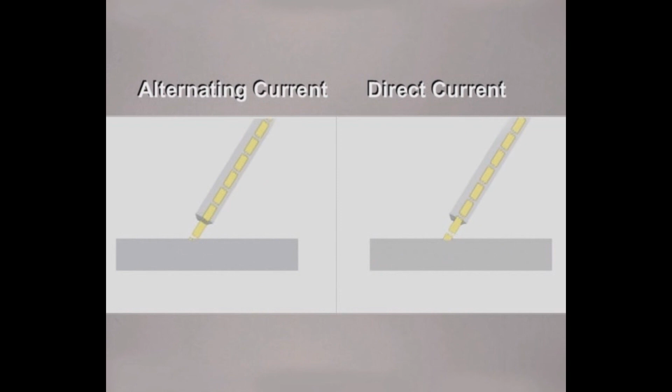Whether your welding machine is electric or portable, the power source will provide either alternating current or direct current to the electrode. Alternating current flows in both directions, creating an amperage lag. Certain welding rods have been designed with stabilizers in the flux to help maintain the arc through these lags. Direct current welding machines provide a steady flow of current in one direction. The direction of flow, called polarity, is determined by how the leads are connected to the welding machine. DC plus with electrode positive is the polarity typically used for shielded metal arc welding.

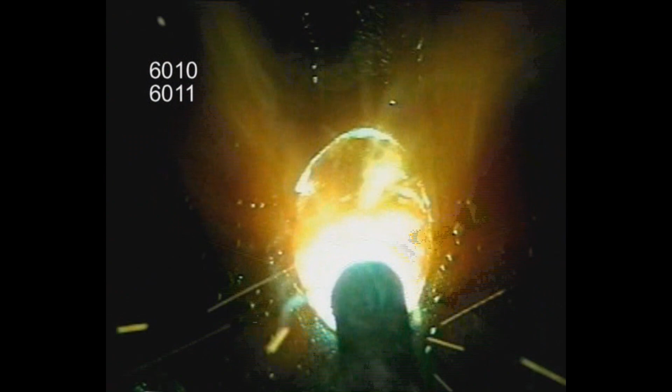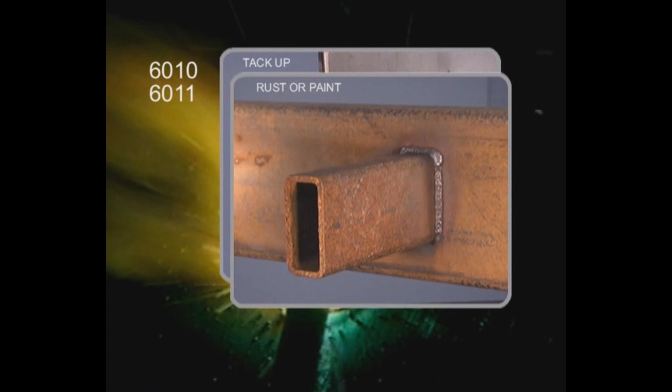All the common rods used for welding on carbon steel have characteristics that make them better suited for different situations. The fast freeze rods have a strong arc force that helps burn off surface impurities. A circular or side-to-side motion can be used to build up weld, or because of the light flux coating, these rods can be stepped to provide maximum penetration. In the vertical weld position, 6010 and 6011 can be run either uphill or downhill. These are good rods for tacking up weld joints, welding metal that is slightly rusted, filling gaps in poorly fit joints, and as a first pass for good penetration.

The filler rods don't penetrate as deep, they build up weld. Stabilizers in the flux make 6013 one of the simplest rods to use. With a slightly heavier slag covering, try to keep the arc in the puddle. 6013 can also be run either up or down on vertical welds. For general purpose welding, 6013 produces a smoother finished weld bead.

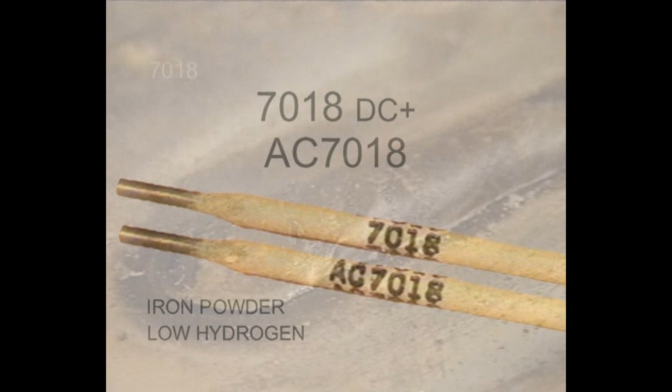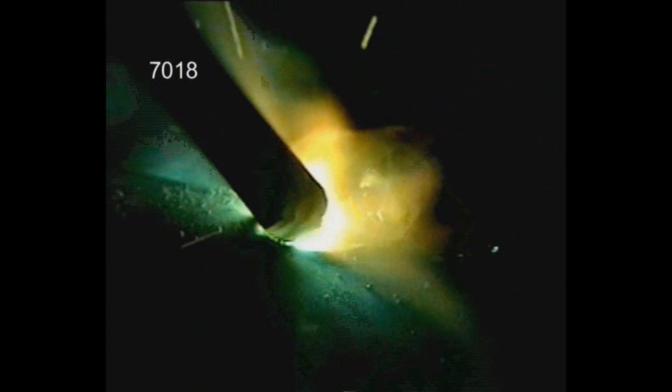7018 contains iron powder in the flux and low hydrogen characteristics. Except for directly under the arc, a heavy slag covers the entire weld puddle. Either running straight or with a side-to-side motion, the arc needs to be maintained on the leading edge of the puddle. In the vertical position, 7018 is run uphill. 7018 requires better rod control, but does provide the strongest welds for heavy stress situations and also the smoothest welds for ornamental type projects.

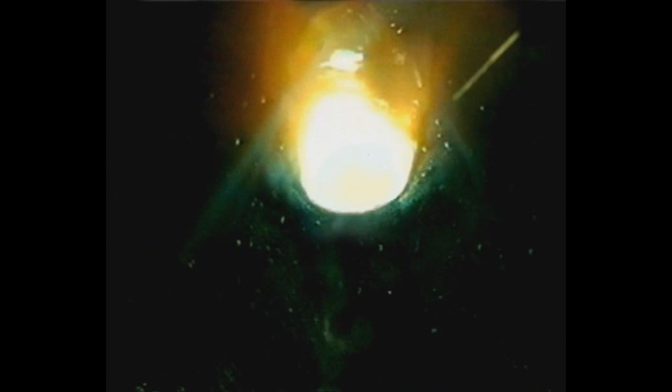You should always examine the finished weld bead for any defects, but really, you need to see the weld as it's going in. This is a totally manual process. You have to control the heat and filler metal during the weld by watching and understanding the molten puddle. Look past the rod and the light, focusing directly on the molten pool. Watch the edges and the weld buildup, constantly analyzing how it's flowing out and how fluid it is, making slight adjustments when necessary.

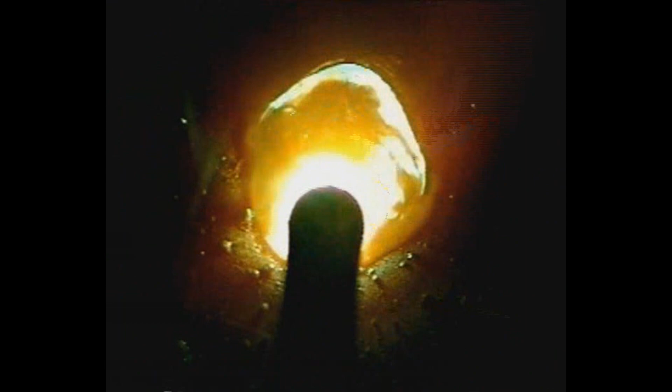The amperage setting, which regulates the amount of current flowing through the rod, is the main control of the heat available to the weld. When the amperage is set too low, the puddle only forms under the rod. Increasing the amperage generates enough heat to form a molten pool. Along with starting to get penetration, this is where you begin to have control of the edges of the puddle and the weld buildup. There isn't an exact amperage setting here; in fact, this is one of those things that welders see differently.

Also, as the metal thickness or weld position changes, the amount of heat required will be different. Watch the puddle. You're looking for it to flow out to the sides of the rod. When the amperage is increased more, the molten pool penetrates deeper and spreads. Eventually, the filler metal becomes so fluid and agitated you can no longer control it. Experiment with the amperage setting. For good penetration and smoother welds, you want the amperage set as high as you can while keeping the molten metal from becoming too fluid to handle.

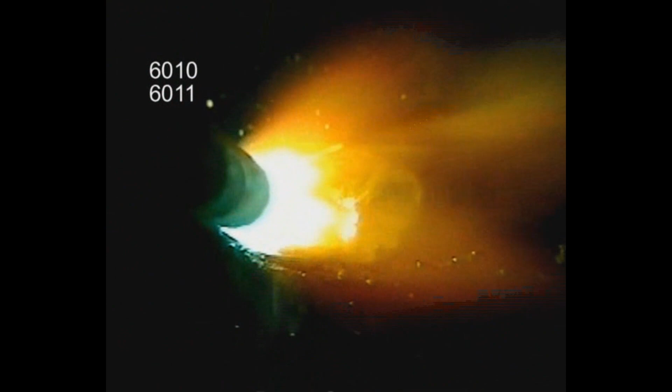Because of the characteristics of the flux coating, the puddle will look different depending on the type of rod you're using. The entire puddle is visible with 6010 or 6011. Slag covers the top rim of 6013, but the molten metal is still visible on the sides, and the puddle should move easily with the rod.

With 7018, slag covers the entire puddle, but you still want to see it flowing out to the sides, with the slag solidifying back from the rod. During the weld, the filler metal is actually solidifying underneath while the slag stays molten.

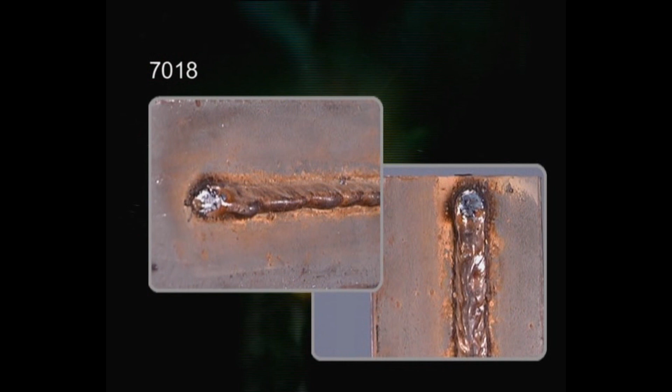In the horizontal or vertical position, the slag can run or drip. Don't let this fool you into thinking the weld is too hot. You'll probably need to experiment more to set the amperage for 7018, but you will get better results running a little to the hot side.

Regardless of which rod you use, the amperage only provides the heat. The rod angle determines how fast the metal will heat up. When the rod is held more perpendicular, the molten pool forms and spreads quickly, allowing a faster travel speed to limit penetration on thinner metals, deposit less metal for a smaller weld, or flatten the bead in a bevel.

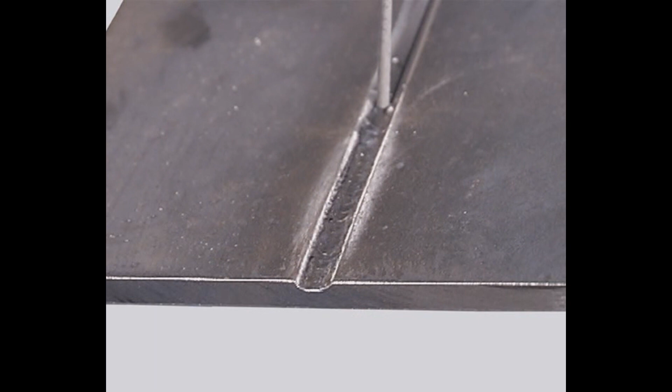As the rod is angled, some of the heat is taken off the metal. A slower travel speed can be used to build up a crowned weld bead. If the rod is angled too much, the metal won't get hot enough. The molten pool will narrow, the bead will stack up, and you'll lose control of the edges of the puddle.

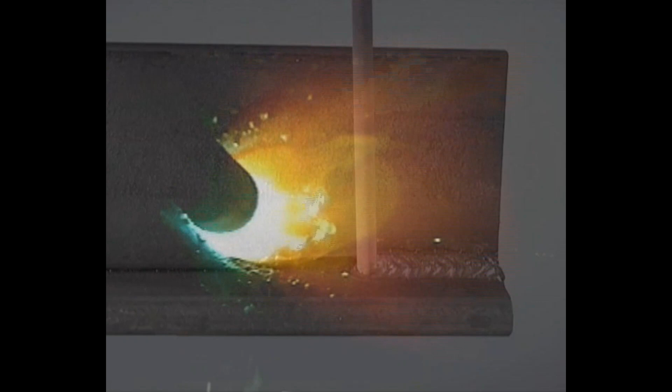On most weld joints with a good fit up, you want to maintain a consistent rod angle to produce a uniform weld bead. In some situations, though, you may need to vary the rod angle during the weld. To fill a gap in a weld joint, the rod can be angled more, slowing down to deposit more metal, keeping the build-up uniform, then angled back up to finish the weld.

Controlling the rod angle takes a little practice, but you need to stay loose and relax. Whether you're holding the rod up to flatten the bead or angling it to build up weld, you want to travel at a speed that keeps the molten puddle the same size.

Watch the puddle. If the travel speed is too fast, the metal doesn't have time to melt, so the puddle narrows. If the travel is too slow, the metal gets hotter and the puddle spreads. Depending on the rod, the filler metal may flatten out or stack up and roll. Always maintain the size of the puddle with the travel speed.

Last is the arc gap, which is the distance from the tip of the rod to the metal. Shielded metal arc welding machines use a constant current power source. The amperage is set with the voltage varying to maintain the arc. You want to avoid jamming the rod right down against the metal or long arcing too far, but you can use slight variations in the arc gap to help control the heat and shape the weld.

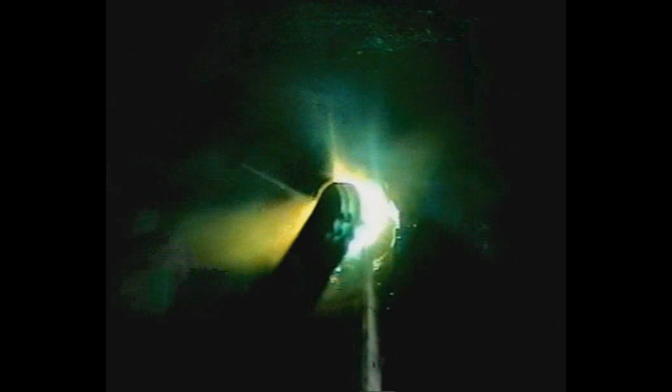This is difficult to measure, but a medium arc length is used to build up weld. Shortening the arc reduces the heat, cooling down the weld puddle. Try using a shorter arc gap on vertical up with 7018 when you want to build up more weld. Slightly lengthening the arc causes the heat to increase, spreading the puddle out, and is used with a more perpendicular rod angle for making smaller beads or flattening the weld on heavier metal.

It is important to be consistent though. Varying the arc gap during the weld changes the heat, making it difficult to maintain a uniform weld puddle.

When you start looking at all the aspects of running a weld bead, there are many possibilities. That's why everybody welds a little different. Practice and experiment, trying to make that puddle do what you want it to do. Watch other welders if you get the chance, but in the end, you need to see the weld puddle at the end of your rod and develop a style that works for you.

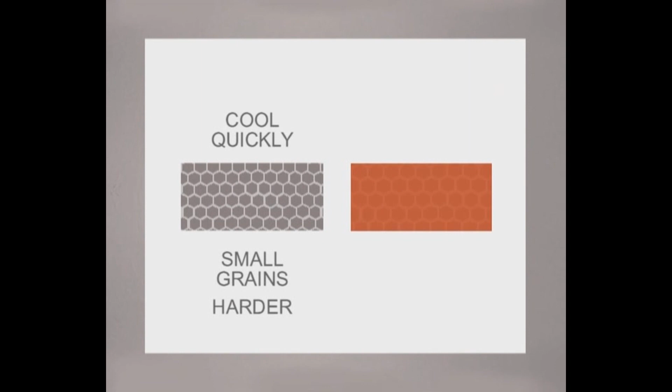We've been looking at heating the metal to allow the molten pool to penetrate and fuse. All that heat also has an effect on the base metal itself. Metal is made up of groups of atoms bonding together to form grains. When metal is heated past a certain temperature and cooled quickly, smaller grains are formed, making the metal harder. Cooling the metal slowly allows more atoms to bond, forming larger grains, which makes the metal softer.

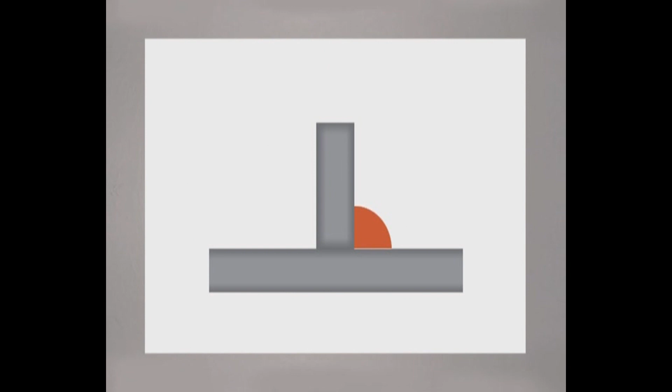In welding, the metal adjacent to the weld bead becomes hot enough to change the structure of the grains. Because only a relatively small area is heated, the metal cools quickly, forming smaller grains and becoming harder right alongside the weld. Welding also causes the pieces of metal in the joint to draw. Heated metal expands, so during the weld, the molten filler metal is deposited in its maximum expanded state. As it cools, it contracts. When the metal is free to move, it will draw in the direction of the weld.

If the pieces being welded are trapped, the molten weld metal still contracts, leaving some residual stress in the metal. There isn't any way to stop this—the metal is going to move. Whenever possible, weld on both sides to reduce the draw, and on pipe or square tubing, use a sequence of welds to help control the draw.

Extreme differences in temperature do have a greater effect on the metal. If it's freezing cold, use a torch to heat the metal up a little. Condensation will appear, so just warm it up until the moisture dries. Also, if you're welding on harder, higher carbon steel, which does not handle expansion and contraction very well, a preheat may be necessary to prevent the weld from cracking as it cools.

As always, there are a lot of variables: the type of steel and the stress that will be put on the finished product. In most cases, projects are designed so that the stress put on the weld joint does not come anywhere close to the maximum strength of either the metal or the weld. Try to complete the weld once you start it and avoid building up more weld than necessary. When you're finished, let the metal cool slowly. If the metal does break next to the weld, you may need to take a closer look at the thickness of the metal being used and the overall design.

Okay, let's take a look at putting two pieces of metal together.

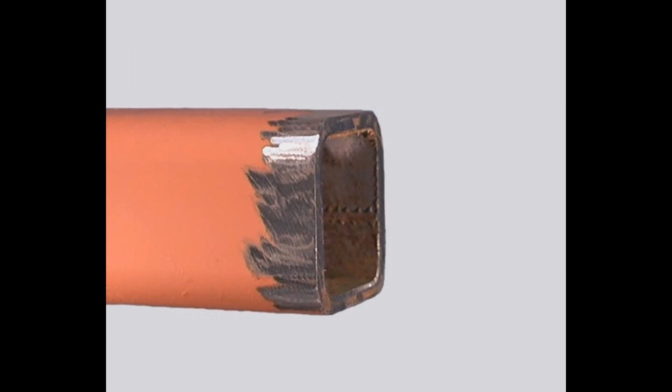The first steps with any type of weld joint are metal preparation and joint fit-up. If you're working with new metal, most rods can handle the mill scale, which is a dark layer on the surface. Use a grinder to clean any metal that's rusted or painted. Impurities on the surface can cause porosity, lack of fusion, or even interfere with the arc.

When you're cutting metal, keep the edges straight and square. If you use a torch, chip or grind off any slag left from the cutting process. During fit-up, use good tacks to hold the pieces together, and if you're leaving a gap, keep it uniform. Irregular gaps in the joint not only take longer to weld, they make it way more difficult than it should be. You can avoid a lot of problems by cleaning the metal and taking your time on fit-up.

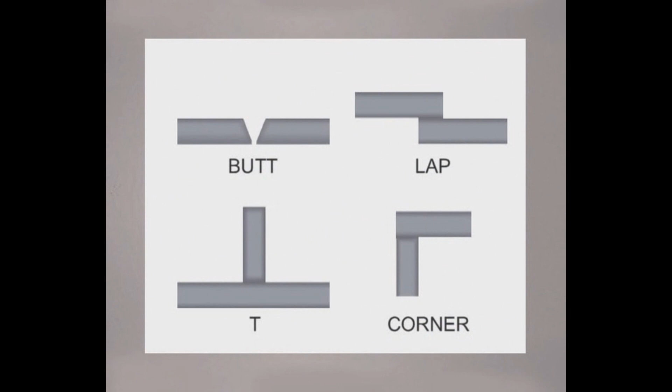While there are many variations of weld joints, there are generally considered to be 4 types: butt joints, lap joints, T-joints, and corner joints. On a butt joint, the weld should penetrate deep, with the amount of weld deposit at least equal to the thickness of the metal. For maximum strength, 100% penetration welds are used to completely fuse the edges.

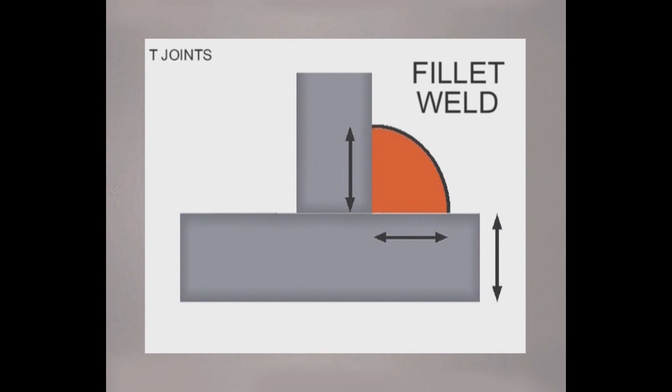On a lap joint, the weld is called a fillet, with the legs coming up and out a distance equal to the thickness of the metal and the weld slightly crowned. A fillet is also used on T-joints, where the edge of one piece is joined to the surface of another. Welding on both sides reduces the amount of weld necessary and overall produces a stronger joint. Corners are joining the edges at an angle, with metal preparation or fit-up allowing for sufficient penetration and weld deposit.

Let's start with butt joints, and this can be on plate, flat bar, angle iron, pipe, or square tubing. When the metal is around 1/8 of an inch thick, keep the edges straight and square for a perfect fit. You'll generally get good enough penetration just butting the pieces together, especially if you can weld on both sides or all the way around. On plate or flat bar, tack right on the outside edges to help carry the heat.

For square tubing, tack the corners, then weld opposite sides from tack to tack. If you intend to grind the weld off for a smooth finish, you can leave a very slight gap, but keep it uniform. Whenever possible, start at the outside edge and weld towards more metal.

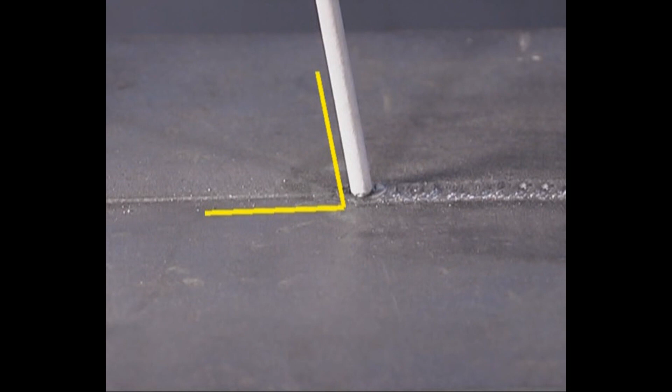In the flat position, hold the rod fairly perpendicular to the metal. You can weld with 6010 or 6011 using a circular motion. Turn the amperage down a little, but you're going to have to travel faster to control penetration and avoid burning through. For a smoother finished bead, try 6013 or a 3/32 7018 with a side-to-side movement.

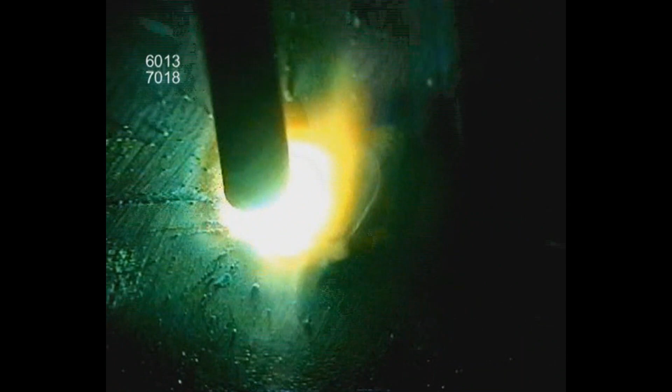On a horizontal, hold the rod nearly perpendicular to the weld. Watch the puddle—with 6010 or 6011, adjust the travel speed to let the puddle spread out without overheating the metal. Watch the top side to avoid undercutting. With 6013 or 7018, try running straight without any rod movement, maintaining a uniform arc gap and travel speed.

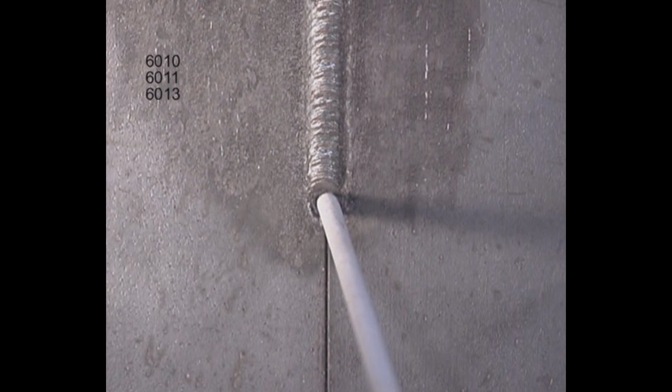If you can position the joint, butt welds on 1/8 metal are easier welded vertical down. 1/8 metal is fairly thin for stick rod, so use some practice metal to figure out the amperage and adjust your travel speed.

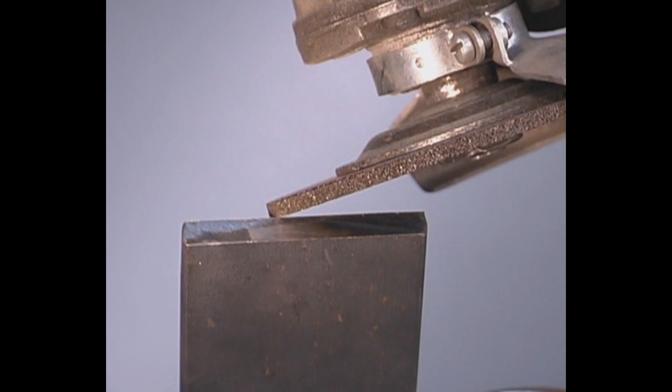Starting at 3/16 of an inch, you want to bevel the edges to allow for good penetration. Bevels are generally around a 30-degree angle, with the top edge straight and a flat spot called the land on the bottom. Hold the grinder at a slight angle, using the bottom corner of the disc to take off metal. When you have it close, hold the grinder flat to smooth the bevel and straighten the top.

On heavier metals, it may be easier to cut the bevel with a torch, then finish it with a grinder. The reason for beveling the edges is to control the puddle deep in the joint. If the bevel isn't wide enough to get the rod into the bottom, you can always take the grinder up on edge, slightly cock it, and use the curve of the disc to open the bevel up a little more.

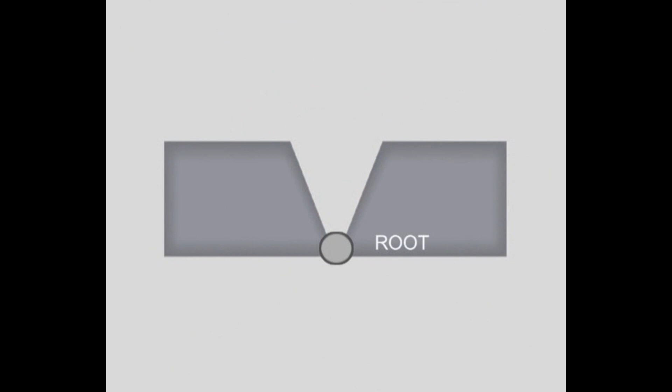A beveled butt weld can be divided into 3 parts: the root, which is the first pass fusing the bottom of the joint, the filler, and the cap. There are several options in fitting up butt joints, and the main difference is how the root pass is welded. The bevel pieces can be fit up with a small gap, allowing the first pass to penetrate as deep as possible. For 100% penetration, either a backup bar is used, with the first pass fusing all 3 pieces, or the metal is fit up with a gap, and the root fuses the bottom edge and actually builds weld on the back side.

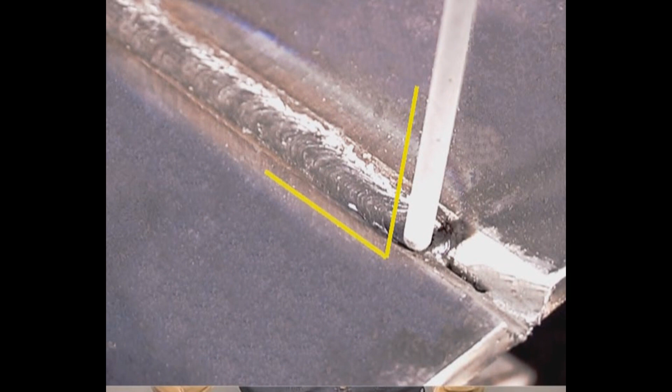After the first pass, filling and capping is basically the same, so let's take a closer look at getting the joint started. Anytime you weld in a bevel, you want to hold the rod fairly perpendicular to the metal to flatten the top of the bead. If you angle the rod, the weld bead will crown, leaving slag that may get covered on the next pass.

You also want the weld buildup even. Use a grinder to knock down any high spots from stopping and starting. It's a lot easier to keep it uniform with a grinder than to try to fix it with the next weld bead. Also, if the bead does crown in the bevel, use your grinder to knock off the top to avoid trapping slag.

Not all welding situations require 100% penetration. That depends on the type of stress placed on the joint. But you always want to bevel the metal, leaving at least a small gap. 6010 or 6011 will provide good penetration, and for the first pass are a little easier to deal with in any of the weld positions.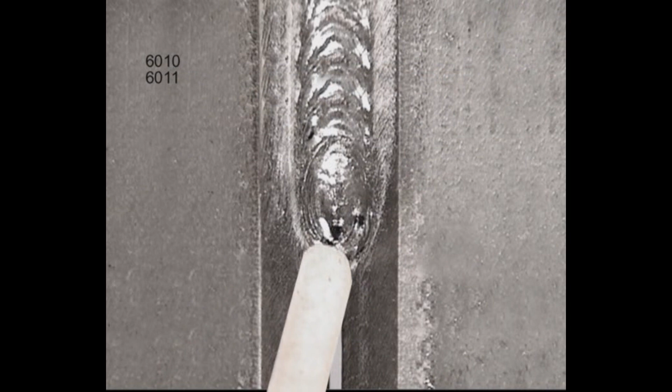You can use a whip or step motion, gouging into the metal for penetration, then pushing the puddle in to fill. Watch both sides to avoid undercutting along the edges. For more weld buildup, try using a modified circular motion, always coming back to the leading edge of the puddle in the bottom of the joint.

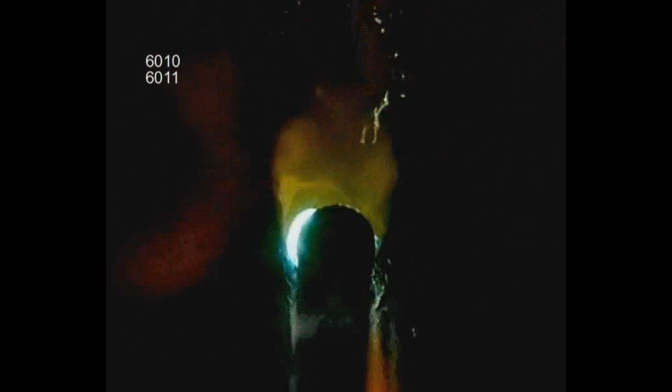If you can handle the puddle, you can also use a filler rod. With 6013 or 7018, hold the rod fairly perpendicular. Use a slight side-to-side movement and avoid jamming the rod into the sides. Depending on the bevel and gap, you may need to follow the metal to maintain a uniform arc gap. The base metal is getting thicker as you come up the bevel, taking more heat.

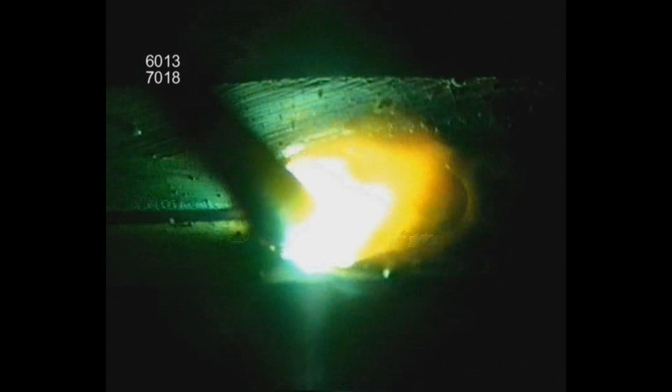During the weld, you want to see the edges of the puddle flowing out and tying in on the sides of the bevel. After the first pass, chip the slag, clean it with a brush, and you're ready to fill and cap. If you can get to both sides of the metal, you can weld the backside for a stronger joint. Grind down to clean metal, keeping the depth and width uniform. With the rod angled a little more, slow the travel speed and build up welds slightly wider than the groove and above flush with the surface.

Some welding situations require complete penetration for strength. If the pieces being joined do not fit up perfectly, or with some grades of hardened steel that tend to crack on the first pass, a backup bar is used. A V-bevel with a backup bar is also the procedure for structural welding tests. The goal is to melt and fuse the bottom edges of the pieces being joined to the backup bar.

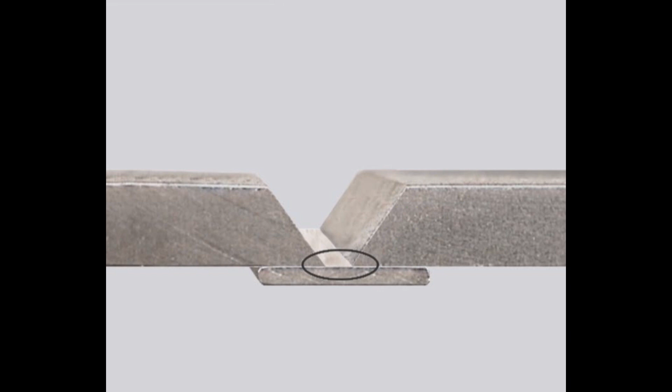Prepare the bevels with slightly less of an angle and a feathered edge. Grind off the mill scale on the backup bar. Only a narrow strip is going to get tied in, and you don't want surface impurities taking the heat. Fit the backup bar tight with around a 1/4 inch gap. This type of joint is generally welded all the way with at least a 1/8 7018, and you have to be able to get the rod all the way to the bottom.

Either tack up on the backside, staggering the tacks, or in the bevel. When you tack in the bevel, grind the starts and stops thin. Always keep in mind, along with fusing the pieces at the bottom, you also want the top of the weld relatively flat to avoid trapping slag.

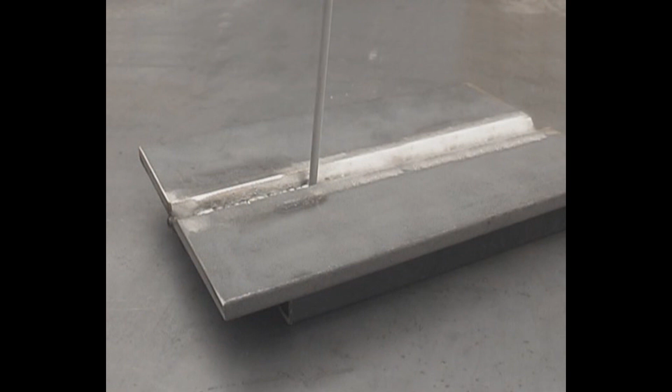In the flat position, hold the rod nearly straight up and down, angled slightly back towards the weld. Keep the arc on the leading edge of the puddle. With a slight side-to-side movement, pay attention to the arc gap. You want to see the edges of the molten pool tying into the sides of the bevel to avoid crowning the bead.

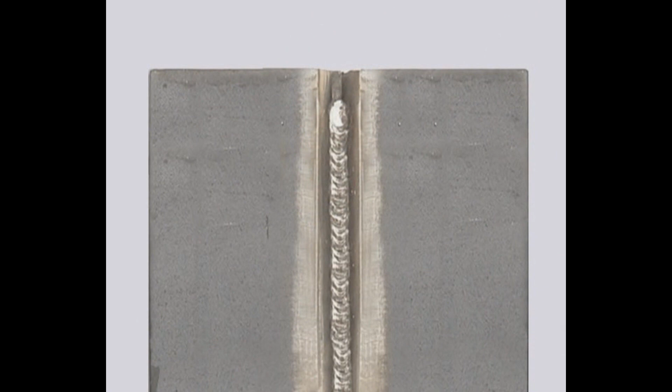When you're using 7018 in a bevel, stay ahead of the weld buildup and slag. If molten slag is pushed in front of the rod, it can interfere with the arc or limit filler metal fusion along the sides. On vertical up welds, you won't have any problems fusing the base metal to the backup bar. You do want to keep the weld bead flat without undercutting along the edges.

Keep the rod fairly perpendicular to the metal, angled up slightly. The puddle needs to flow out on the sides for a flat weld bead and to avoid undercutting. Travel up fast enough to keep the metal from overheating, which causes the molten puddle to spill down. You may need to lower the amperage a little, maybe 5 amps or so, but don't lower it too much, as many problems are caused by running too cold on verticals as by running too hot.

Remember, the amperage only provides the heat. It's the travel speed, rod angle, and arc gap that determine just how hot the metal is going to get.

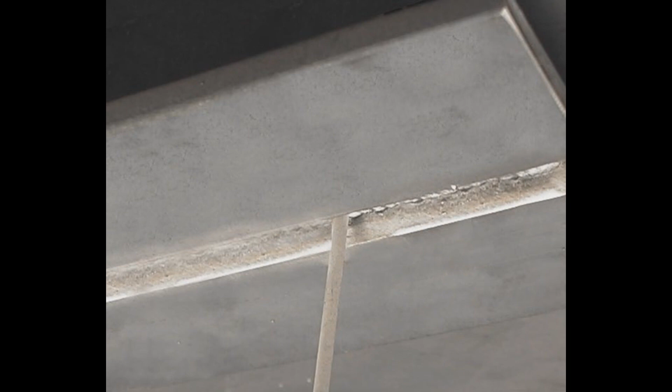On overhead butt joints with a backup bar, you don't get to build up quite as much weld bead. With the rod nearly straight up and down, adjust the travel speed to let the puddle spread out without overheating the metal. Most of the problems with overhead come from not controlling the rod.

When the tip dances around, varying the arc gap, the amount of heat at the weld is not uniform and focused. Find some way to steady yourself so you can control that rod. Also, if the rod is angled too far back towards the weld, the molten filler metal takes the heat instead of the metal, causing the puddle to drip.

Horizontal is generally not used for welding tests, but you often get them in practical situations. Angle the rod up and slightly into the weld. The bottom bevel acts as kind of a landing, helping to hold the weld, so you may be able to use a slight rod movement.

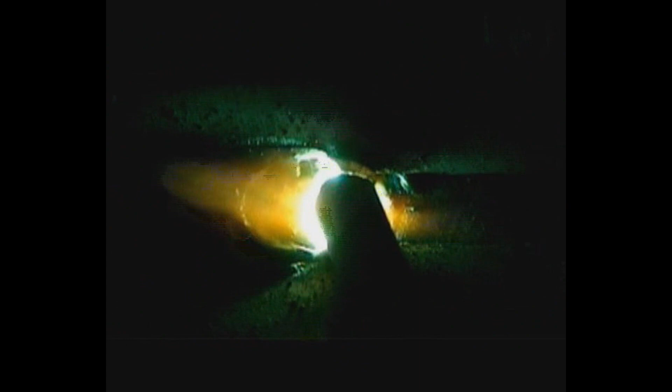Watch the top side and push the puddle up. Set the amperage to allow a fast enough travel speed so the base metals don't overheat, which causes the puddle to become too fluid. Don't try to carry a lot of metal on a horizontal. Just get all the pieces tied together and keep the filler metal from sagging.

The last type of root is in a V-beveled open butt joint. We're going to shove a 6010 rod deep into the gap and run a weld bead on the back side of the metal. Preparation and fit-up are more critical, so take your time getting the metal ready.

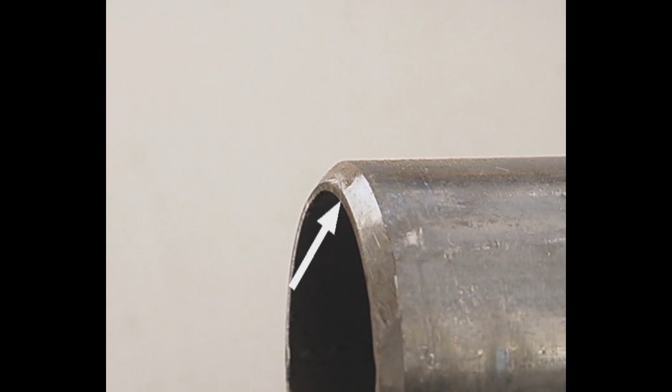The edge of the bevel needs to be straight and square. Grind off all the mill scale on the bottom side. A half-round file works good to clean up the inside of square tubing or pipe. The landing should be uniform. Use a file to knock down any high spots.

With a 1/8 6010, I use a 1/16 oxyacetylene welding rod as a spacer with around a 16th landing. The size of the gap and landing can vary a little, but when you figure out what you like, try to keep it consistent for every weld you make.

Line up the bottom edges of the metal. With a spacer to adjust the gap, run one tack, pushing the rod right down into the gap. Before you finish tacking up, remove the spacer. As tacks cool, they contract and the spacer gets jammed up. So pull the spacer, make sure the gap is uniform, and finish tacking the joint.

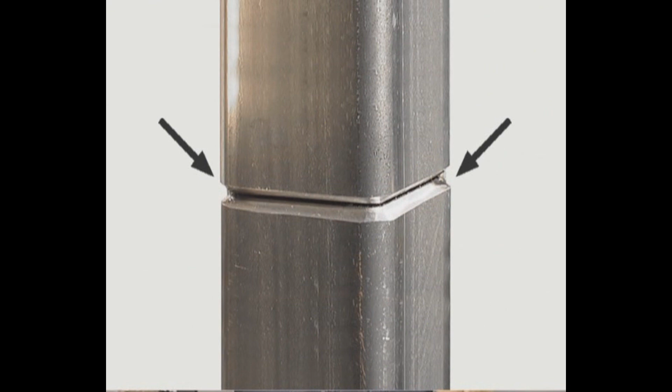On heavier pieces, after the first tack, use a small wedge or a screwdriver to keep the gap uniform. Because of the taper, you can remove these after the joint is completely tacked. On square tubing, tack opposite corners. For pipe, opposite sides. Make sure the gap is uniform, straightening when necessary, then put in two more tacks.

Flat, horizontal, overhead, and vertical down root passes are all done the same way. Grind the edges of the starts and stops thin. Hold the rod perpendicular to the metal. Scratch start right on the tack. Push the rod down into the puddle and start moving.

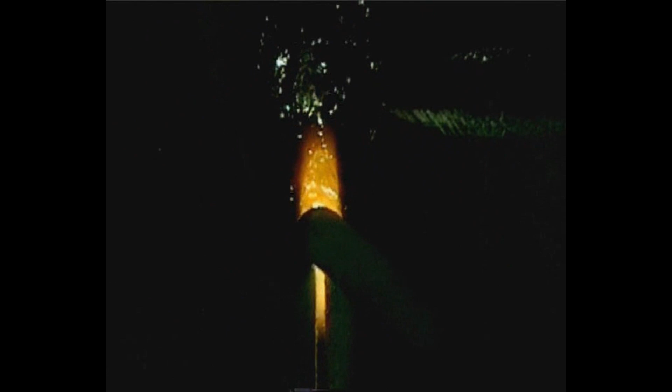The filler metal won't squirt out the back until you hit the thinned out edge of the tack, and it can poke through. Then move as fast as you can keep the gap filling in. If you're not getting all the way through, you will see filler metal squirting out behind the rod, back up in the bevel.

Most of the light and sparks will be on the back side, and you're building weld on the back of the metal. You want the amperage relatively high, so try starting about the same as you'd run flat. If you do open a hole, stop right away, pulling the rod back over the bead. Restart right at the edge and keep going. When you finish the weld, grind the edges thin on both sides of the hole and fill it in.

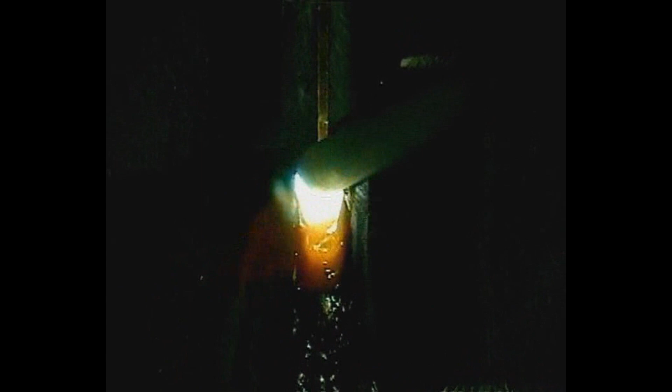Some welding procedures require a vertical up root pass, and generally you'll need to run about 5 amps lower for uphill. The easiest way is to prepare the metal exactly the same, with a uniform narrow gap, shoving the rod in perpendicular and moving up as fast as the gap fills in. Some welders like to thin out the landing a little more, and with a step motion, rip a small keyhole, then fill it in, rip a hole, and fill it in, always keeping the rod deep in the gap.

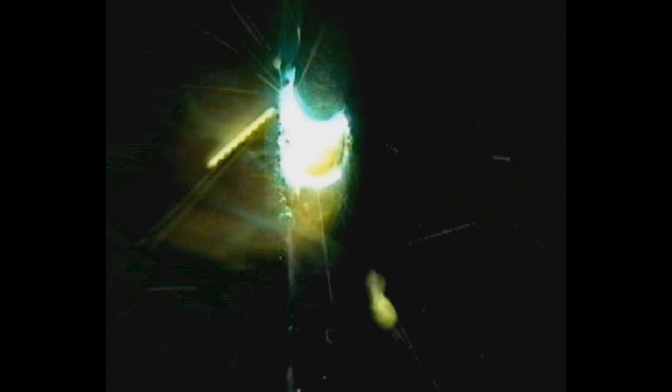Other welders like to leave a little thicker landing and wider gap, here again using a step motion, laying metal in and making sure it's fusing on the bottom corners. The disadvantage to stepping the root is the possibility of undercutting along the edges on the back side. The advantage is that you actually see the root going in for 100% penetration. Stepping the root uphill also works well when the gap is uneven, with wide or narrow spots.

The backside bead should be above flush, with the entire bottom edges of the bevels melted and fused. Any missed spots are called insufficient penetration. If the travel speed was too slow, the bead stacks up on the backside, causing excessive penetration. On the front side, because the rod was jammed right down against the metal, the bead will crown and undercut along both sides. Grind this out to avoid trapping slag.

The metal will be thin from grinding, so you need to run another bead called a hot pass to add a little more metal and burn out any slag left behind. With 60-10, try stepping in the hot pass, not gouging quite as deep on the backstroke. Use a faster travel speed so you don't burn through, and watch the sides to avoid undercutting.

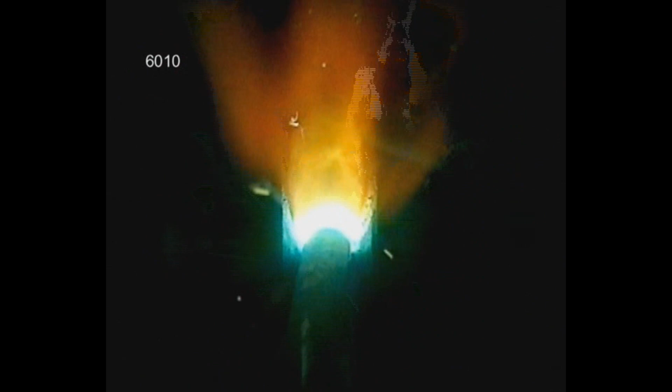You can also hot pass with a 3/32 70/18. Hold the rod fairly perpendicular. Carry the heat on the sides, moving across the center relatively quick. Don't try to build up a lot of weld, and make sure the sides of the puddle flow out so the top of the weld stays flat.

Once the bottom of the joint is fused with any of these procedures, you're ready to fill and cap, and you will get better results using 60-13 or 70-18. If the metal isn't too thick, you may be able to finish with one more pass. On heavier metal, when more filler is required, remove all the slag between passes with a chipping hammer and wire brush. This comes with experience, but plan the weld.

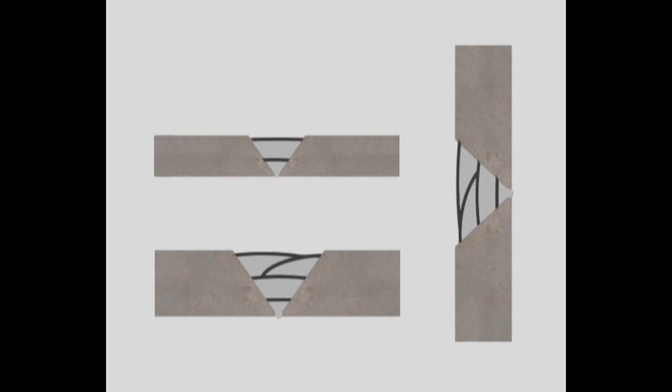When several filler passes are required, overlap the edges of the previous beads if possible. The last filler pass should be slightly below flush. Try to leave the top corners of the bevel. With a slight side-to-side movement, pay attention to the arc gap. Don't jam the rod into the sides of the bevel.

Keep the rod fairly perpendicular and the puddle flowing out to avoid crowning the bead. You may need to speed up or slow down to control the amount of filler metal deposit, but try to leave the top corners of the bevel. To cap the weld, angle the rod and slow down to build up a crown weld bead. Use the edge of the bevel as a guide to keep the sides of the weld straight.

The finished weld should be as thick as the metal, so if you've penetrated deep, the cap only needs to be slightly wider than the bevel and above flush with the surface of the metal. Piling up more weld than you need doesn't add any strength, just takes longer and puts more heat on the metal. If the top of the bevel is too wide to cap with one bead, run two or more passes side by side to cap the weld.

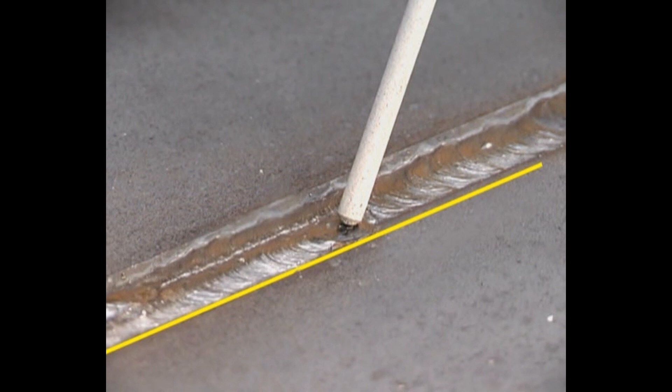With a slight side-to-side movement, using the bevel as a guide, keep the outside edge of the first bead straight. Use the inside edge of the bead as a guide for the second pass. Adjust the travel speed and rod movement so the puddle flows out almost to the center of the first bead. The final pass will generally be smaller.

Try holding the rod more perpendicular to the metal, running straight. Use a faster travel speed for less weld deposit. On a horizontal, angle the rod up slightly with a medium arc length.

Try running straight without any rod movement. The first bead will help hold up the second pass, so hold the rod more perpendicular and travel fast enough to keep the bead from sagging.

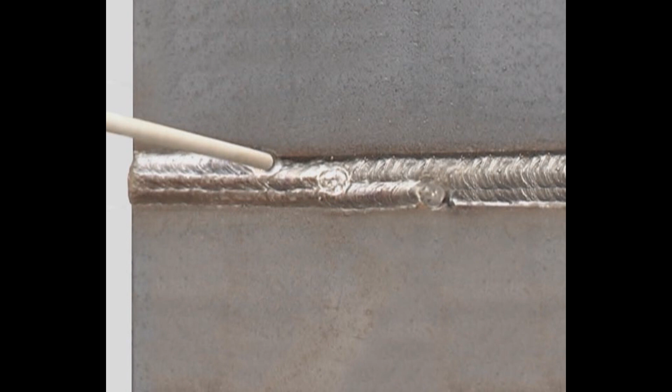For the final pass, try angling the rod down slightly. Travel faster for a smaller bead.

On verticals, you can either use small beads side by side or run a weave bead. Small beads are easier. Use the edge of the bevel to keep the first pass straight. Run as many beads as it takes, but try to leave the other side of the bevel for a guide to keep the final pass straight.

If you're not limited to a maximum bead width by a welding procedure, you can try a weave bead. Start on one side, letting the puddle flow out to cover the edge of the bevel. Cross the center relatively quick to the other side and hesitate until the puddle flows out and covers the edge.

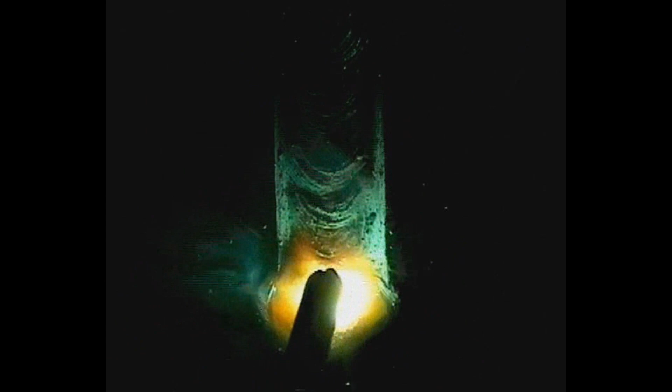Move the rod up a little, then cross, hesitate, move up, and cross. The upward progress is going to be slow, heating the base metal up more, so turn the amperage down a little. Use the edge of the bevel as a guide to keep the sides of the weld straight.

For a smooth weld and straight edges, maintain a uniform arc gap and keep the upward progression tight. Weaving makes it possible to build up a lot of metal, but takes some practice to consistently produce a uniform finished weld bead. Whether you're filling or capping, you need to experiment with the amperage, rod angle, and travel speed,

learning to control the amount of weld deposit and figuring out just how much metal you can carry without having it sag or drip.

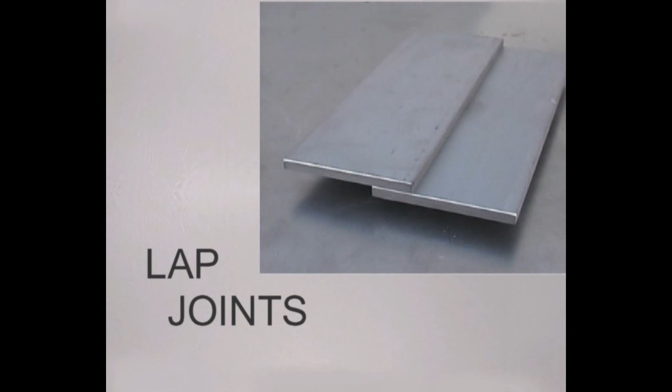With the butt joint, we were joining the edges of the metal. When one piece overlaps the other, it's referred to as a lap joint. The edge, and especially the top corner, is going to get hot and melt faster than the surface, where the heat is being dispersed in all directions.

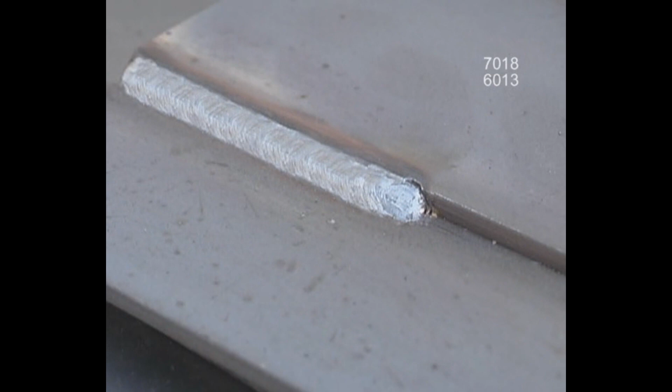You want to fuse the bottom corner while building up a full fillet with a slightly crowned weld bead. Lap joints can be welded all the way with a fast freeze rod, but the filler rods will produce a smoother finished weld. In the flat position, the weld is called a horizontal fillet, and you have two rod angles to consider, one in relation to the metal and the other to the weld bead itself.

In relation to the metal, the rod angle determines the position of the fillet in the joint. The angle in relation to the weld controls the shape of the bead. Holding the rod perpendicular heats the metal quickly, spreading the puddle for a flatter weld. As the rod is angled back, the weld starts to crown.

There are a lot of variables. You have to watch the puddle.

With 6010 or 6011, hold the rod nearly perpendicular to the weld. With the arc on the leading edge, move the puddle into the bottom corner. Push it up to the top edge and bring the rod around to the leading edge.

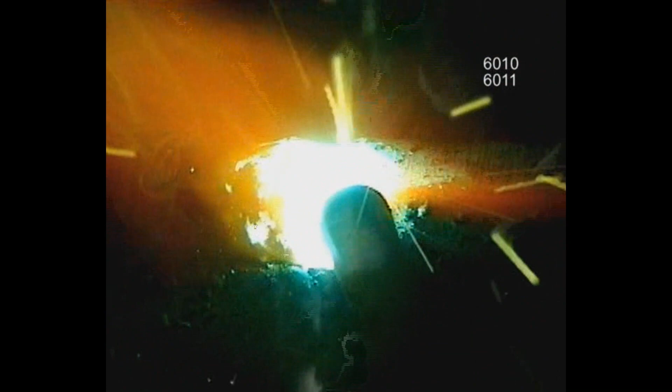You may need to speed up or slow down to provide the heat, but always bring the arc back to the leading edge to fuse the corner. Watch the puddle flowing out to the top edge and tying in on the bottom.

The fast freeze rods provide excellent penetration, but tend to produce a flat or concave weld. Even on thinner metals, it may take a second pass to build up a full fillet. The filler rods build up a smoother weld.

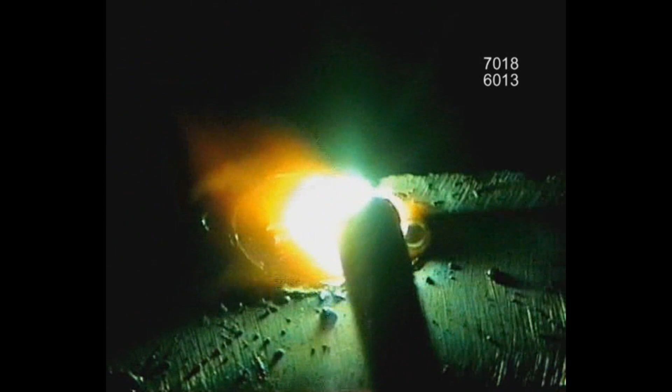Maintain a constant arc gap for a uniform weld bead, adjusting the travel speed and rod angle so the puddle flows out all the way to the top edge. Because the filler metal remains fluid longer, try running straight without any rod movement, keeping the arc on the leading edge of the puddle. On thicker metal, you may not be able to make a full fillet in one pass.

You might be able to get it in two passes, the first one smaller and flat, then slowing down to carry more metal and crown the bead on the second pass. It might take 3 or more passes, and on heavy welds, use 7018 to prevent the bottom beads from cracking.

Put the first one in fusing the bottom corner. Chip off all the slag and wire brush the weld.

Determine how far out the weld needs to be, and holding the rod straighter up and down, angled slightly back towards the weld, run a bead keeping the outside edge straight.

Angle the rod more into the joint and perpendicular to the weld. Then run a second pass filling to the top edge.

Overhead fillets really are like flat welds, just more awkward. Angle the rod into the corner with slight adjustments for different thickness metals. Keep the rod nearly perpendicular to the weld. Watch the puddle flowing out to the edge of the lap piece. As long as you keep the filler metal and base metal from overheating, that weld will stay right up there.

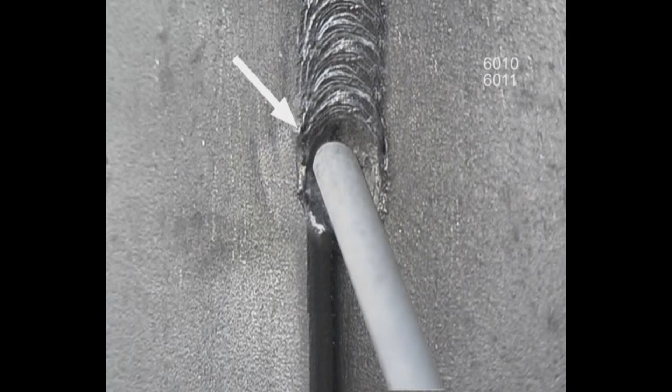On vertical lap joints, the outside corner is going to heat up a lot quicker than the surface. For vertical down welds, angle the rod up slightly. Carry the heat on the back piece. Move into the corner, pushing the puddle to the edge, then back out. Adjust the travel speed to stay ahead of the puddle and make sure you're on the leading edge of the puddle to move into the corner.

You aren't going to build up a lot of weld on a vertical down, so you'll probably need to run a second pass. Vertical up with 7018 will not only provide a stronger weld, you can also build up more filler metal in one pass.

Always keep in mind that 7018 is very sensitive to the arc gap. You don't want to jam the rods into the sides or long arc across the center. Carry the heat on the back piece. As soon as the puddle flows out, move into the corner, letting the filler metal flow to the outside edge, even pulling the rod out a little if necessary to maintain a uniform arc gap. Then back into the corner and across, slowing down to let the puddle flow out.

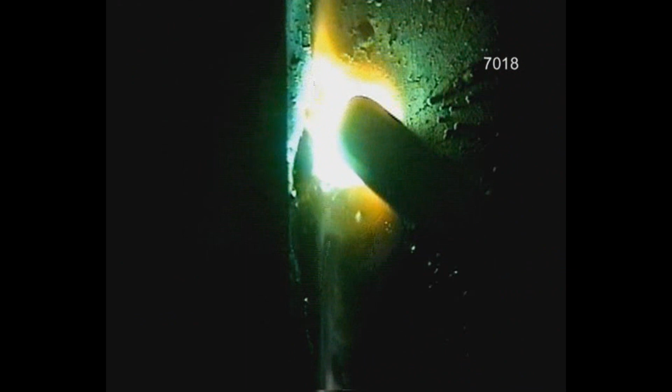Keep the upward progression tight and use a high enough amperage setting so you don't have to wait for the puddle to tie in. If you have any trouble running an uphill fillet with 7018, try starting out with a 3/32 diameter welding rod. The smaller puddle is easier to control. You can also try stepping in a downhill pass of 6010 or 6011 first. This not only provides good penetration, it fills in the corner, making it easier to maintain a uniform arc gap for welding uphill. For heavier metal and more weld buildup, you can either stack weld beads side by side or use a weave bead.

Lap joints in any position are fairly easy to weld. The outside corner will melt away, especially on thinner metal. If the top edge isn't uniform, hold your grinder flat and skim along the edge to straighten it up.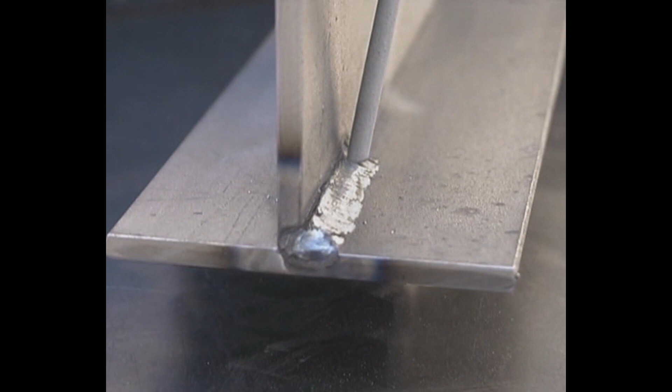A fillet weld is also used on a T-joint, and this is very similar to a lap weld, except you don't have that outside edge heating up quickly. On a T-joint, the top side of the weld is going to require more heat, so angle the rod into the corner to push the puddle up. If the rod is not angled enough to allow that molten pool to flow out to the top, you may leave undercut. With 6010 or 6011, always bring the arc back to the leading edge to fuse the corner.

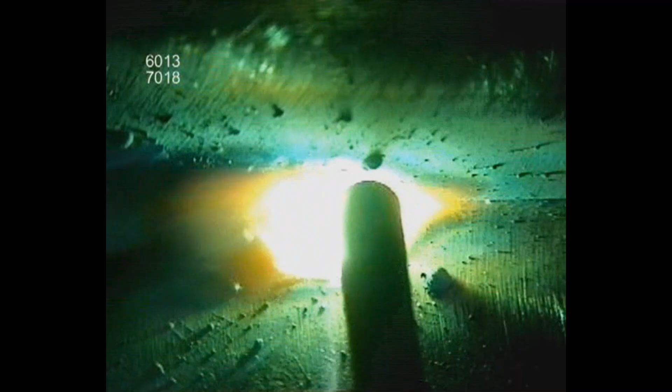Angle the rod to push the puddle up. Watch the top side to avoid undercutting. The filler rod, 6013 or better yet 7018, will provide more weld deposit. In the horizontal position, hold the rod nearly perpendicular to the weld, making sure the molten pool is flowing out both on the top and the bottom. Try running straight, maintaining a uniform arc gap and travel speed. If you need a bigger weld, try using a larger diameter welding rod or stacking up weld beads.

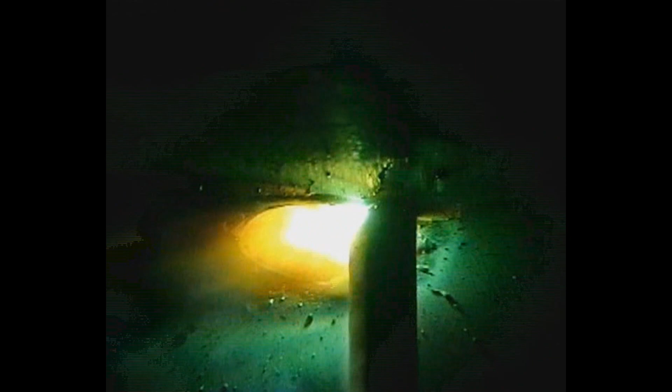Overhead is the same as horizontal. Hold the rod nearly perpendicular to the weld, angled to push the puddle up. Maintain a uniform arc gap and travel speed, not letting the metal or the weld deposit overheat. For more weld, stack beads from the bottom up.

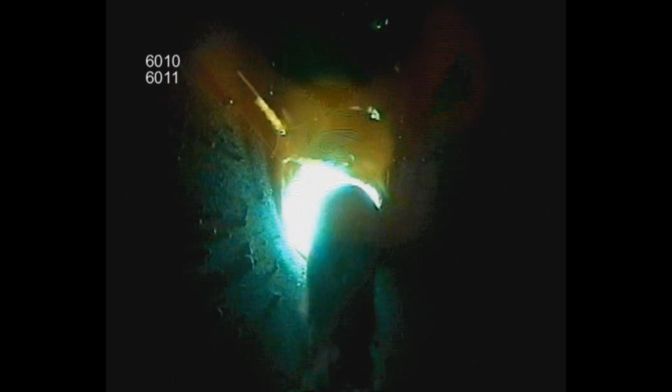On a vertical T-joint, downhill is easier. Use a modified circular motion, always coming back to the leading edge, then pushing the puddle out to the sides. Set the amperage high enough so the puddle spreads out, and travel fast enough to stay ahead of the molten filler metal. Watch both sides to avoid undercutting along the edges.

7018 uphill will build weld faster. For the first pass deep in the corner, angle the rod up slightly. Pay attention to the arc gap, following the base metals into the corner and along the sides. This is very subtle. It's just a little movement into the corner as you're coming across, but jamming the rod into the sides cools the weld down, and long arcing across the center creates more heat.

Most of the problems with running uphill come from not maintaining a consistent amount of heat. When the arc gap varies, the heat varies, making it difficult to adjust the travel speed to keep the filler metal from spilling down. Try to maintain that arc gap. As soon as the puddle flows out to the side, move into the corner and across to the other side.

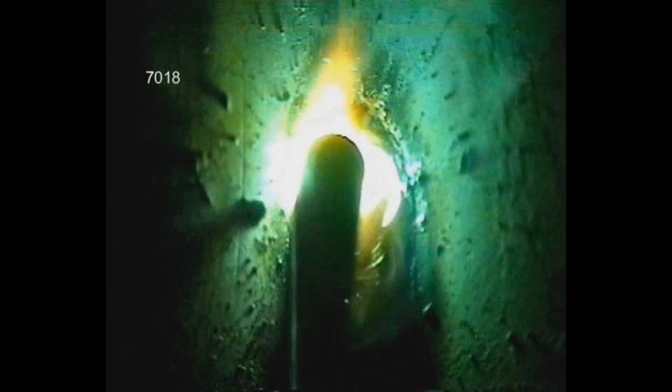Let the puddle flow out and move back. Set the amperage and adjust the travel speed so you don't have to wait too long on the sides. As you gain experience and physical control of the rod, you can try to carry more metal uphill.

But while you're learning to weld, just get that first one deep in the corner, keeping it uniform and avoiding undercut. If you need more weld, maintaining the arc gap on the second pass is a lot easier.

Depending on the amperage setting, slow down or hesitate on the sides until the puddle flows out. Move across the center a little quicker, and slow down to let the puddle flow out on the other side. Then just side to side, keeping the upward progression tight.

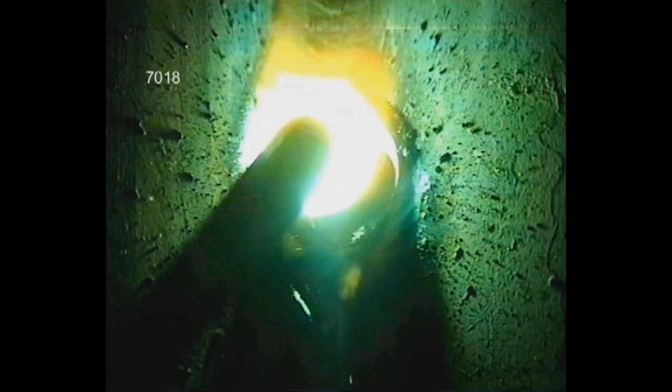For heavier metal and more weld buildup, you can either stack weld beads side by side or use a weave bead. T-joints in any position will draw in the direction of the weld. If you can get to both sides, alternate welding on one side, then the other until you're finished.

Last is corner joints. Depending on the weld position and what you want the finished corner to look like, there are choices in preparation and fit-up to provide good penetration. One piece can be beveled at a 45-degree angle, opening it up so you can get the rod all the way to the bottom. The beveled edge is going to heat up quicker than the flat.

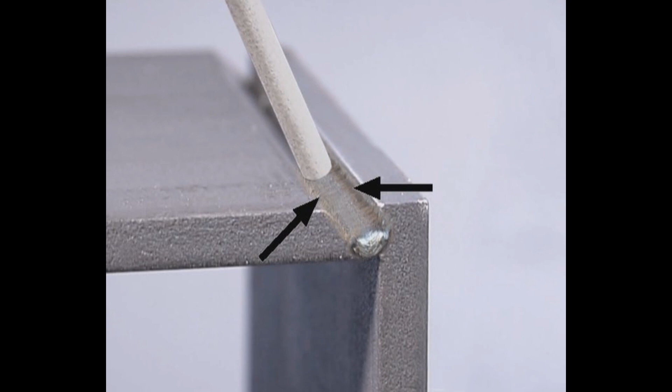Angle the rod into the joint, making sure the puddle flows out and ties into both pieces. A first pass of 60-10 or 60-11 will provide good penetration and is easier to handle in the bottom of the joint.

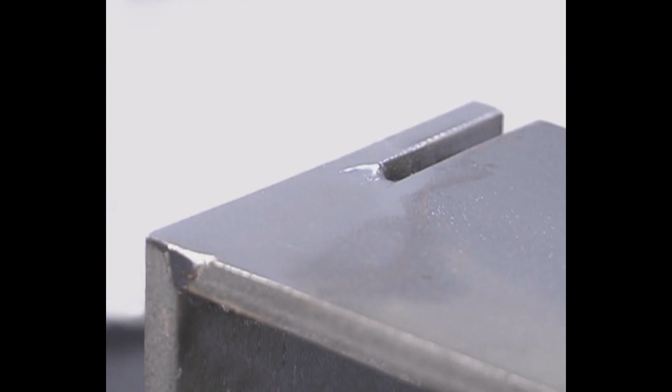With 70-18, try using a 3/32 diameter rod for the first pass, especially in the horizontal or vertical weld position. Keep the top of the filler beads flat to avoid trapping slag and leave the top edges as guides for the cap. On thinner metal, you can tack up the pieces without a bevel, then use a grinder to groove the joint. For ornamental type projects, you can grind the weld for a nice square corner.

Corners can also be fit up butting the inside edges. For maximum penetration, tack up leaving a small gap. This type of fit-up requires less metal preparation, and for ornamental type work, the weld can be polished for a more rounded corner or ground flat for a beveled corner.

In the horizontal position, angle the rod into the corner, fairly perpendicular to the weld, and maintain a uniform arc gap. When both pieces are the same thickness, they should heat up evenly and relatively quick.

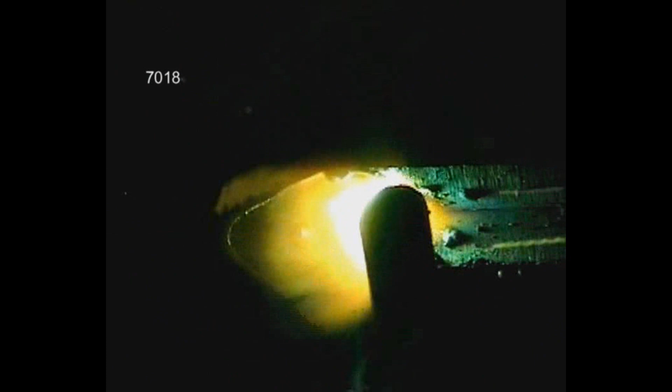With 70-18, adjust your travel speed so the puddle flows out to the top and bottom edges, but move fast enough to keep the weld deposit from sagging. Because both edges are heating up quickly, the filler metal will be more fluid, limiting the amount of weld buildup you can handle without having it sag.

If you need to make two passes to fill the joint, run the first one fusing the corner and out to the bottom edge. Use the second pass to fill in the top. On thicker metal, plan the weld, leaving a little of the corners for the final series of passes.

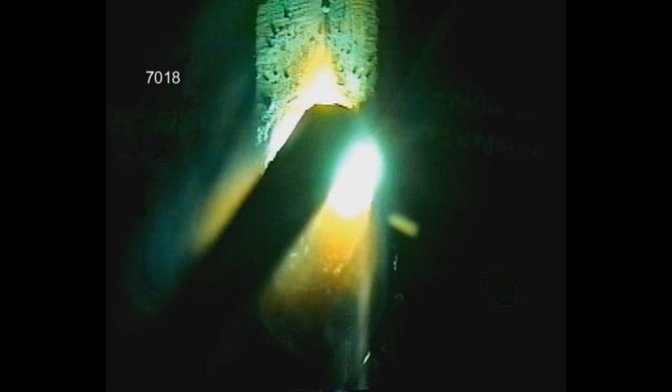In the vertical position, downhill will make a flatter weld and will probably require more than one pass. For vertical up with 70-18, the outside edges are going to melt fast, so try using a smaller diameter rod for better control. Pay attention to the arc gap, following the base metals into the corner and along the sides. Keep moving. You won't have to hesitate at all on the outside edges.

On any type of corner joint, you want the amount of weld to equal the thickness of the metal. If you have any concerns about the strength of the joint, you can make a fillet on the inside, but this will tend to draw the pieces in the direction of the weld. Whenever possible, always try to make the outside weld first.

Well, I hope I've given you an idea of how to put two pieces of metal together. There are many more options in metal preparation and fit-up to provide for penetration, limit the effects of the metal drawing, and reduce the amount of filler metal deposit.

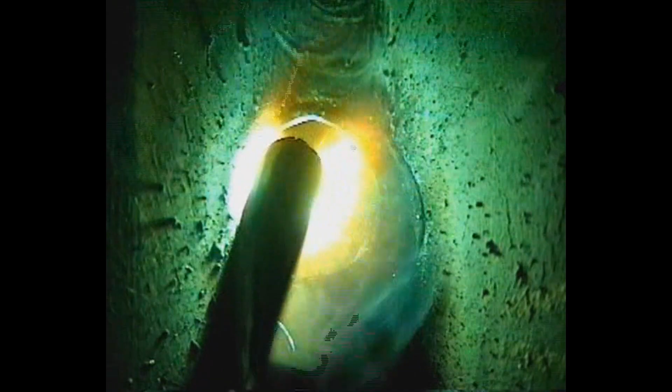Regardless of the type of weld joint you're working on, you need to experiment with the amperage, rod angle, and travel speed, learning to control the amount of weld deposit and figuring out just how much metal you can carry without having it sag or drip.

Make slight adjustments in the travel speed when necessary to maintain the puddle, and use the rod angle to control the shape of the weld buildup. Focus on the weld puddle, watching the sides tie in and keeping the filler metal from overheating. Above all else, take your time, have fun with this, and work safely.